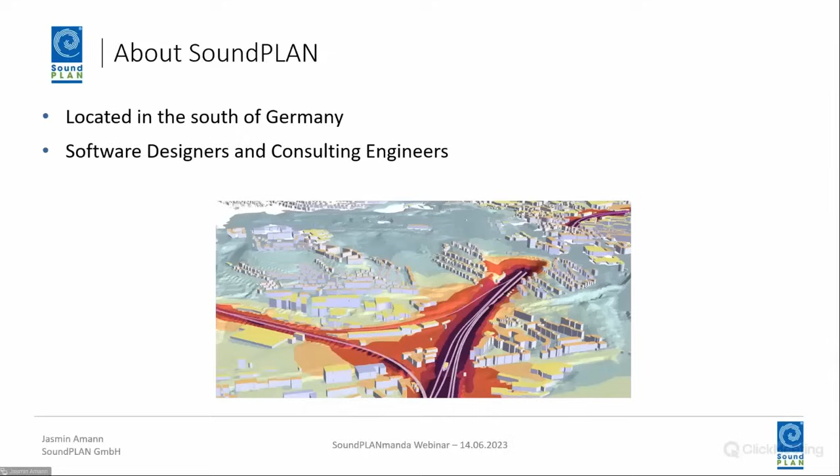SoundPLAN is a small company located in the south of Germany. The 25 employees work as software designers and consulting engineers for noise control and environmental protection. SoundPLAN is an innovative software company and engineering firm active in different fields like noise control and noise mapping, room acoustics, and occupational health and safety.

SoundPLAN offers different software products. First of all, SoundPLAN Noise, it's our all-rounder. Then there is SoundPLAN Essential, it's like the little brother from SoundPLAN Noise, it's for beginners. Then we have Saruma, the software for room acoustics. And last but not least, what we are going to look at today, SoundPLANmanda, the mapping and analyzing software in the field of occupational health and safety.

So I would like to give you an introduction to occupational health and safety. It is well known that too much noise in the workplace is harmful. Too much noise leads to hearing damage in particular. Studies show that high levels of occupational noise are not unique, the problem exists in all regions of the world.

For example, in the USA, more than 30 million workers are exposed to hazardous noise. In Europe, 25% to 33% of the workforce is exposed to high-level noise at least a quarter of their working time. In addition, noise-induced hearing loss is the most common occupational disease.

So, what are the problems and consequences of noise-induced hearing loss? It is a result of long-term exposure to noise. The problem with noise-induced hearing loss is that it is chronic and irreparable damage. This means noise-induced hearing loss cannot be cured.

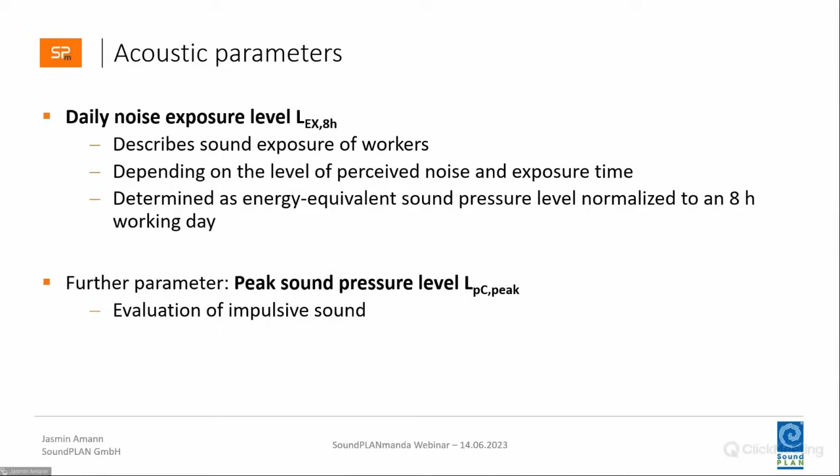A further parameter is the peak sound pressure level, LpC,peak, and the peak sound pressure level is the evaluation of impulsive sound.

So, like everywhere, there are different legal regulations in different countries. For example, in Europe, there's the Directive 2003/10/EC. In the USA, there are some more regulations, for example the Department of Defense Instruction or the National Institute for Occupational Safety and Health.

There are various regulations around the world, some of them are listed here. And the application of the regulation depends, of course, on the country in which the risk assessment is carried out.

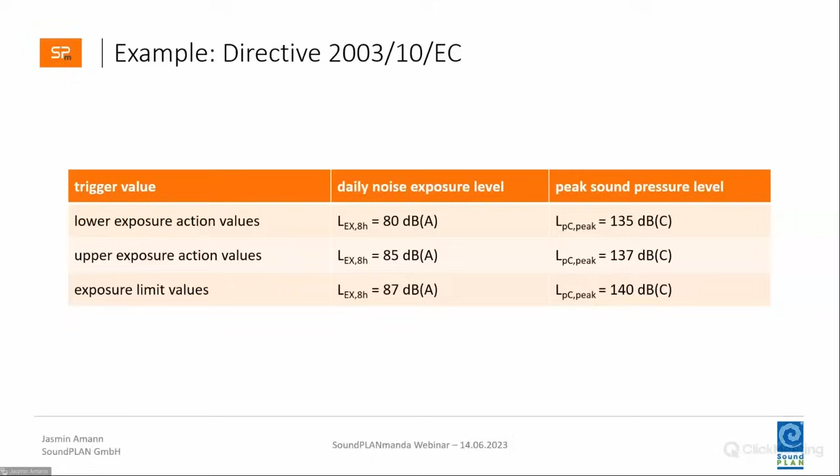For example, I would like to show you the trigger values of the Directive 2003/10/EC. There is the lower and the upper exposure action value for the daily noise exposure level and the peak sound pressure level. The EU directive also defines an exposure limit value. And if the trigger values are exceeded, measures must be taken, for example the wearing of hearing protection.

So we have learned so far that excessive noise exposure in the workplace can have serious health consequences. Exposure to high levels of noise for too long can lead to noise-induced hearing loss. And only when it is known that employees are exposed to too much noise can effective measures be taken.

There are also legal requirements for compliance with the noise exposure level, and therefore an assessment of the existing noise exposure is mandatory. So for the determination and assessment of noise exposure, there is SoundPLANmanda, the mapping and analyzing software.

SoundPLANmanda is our new mapping and analysis software in the field of occupational health and safety. The basis in SoundPLANmanda are classical sound pressure measurements. The measurement data can be easily imported and several measurement data can be offset against each other, for example the mean value from several measurement data can be formed.

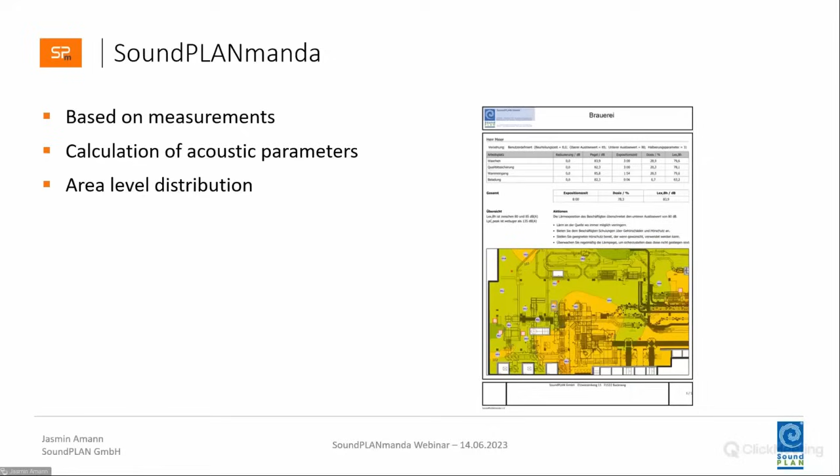However, these measured values do not say anything about the noise exposure of an individual employee. So based on these measurements, SoundPLANmanda determines the acoustic parameters such as the daily noise exposure level. The noise level distribution is clearly presented in colored noise maps, and the size of the mapping area is not limited. It can be a small room, a large hall, or an outdoor area.

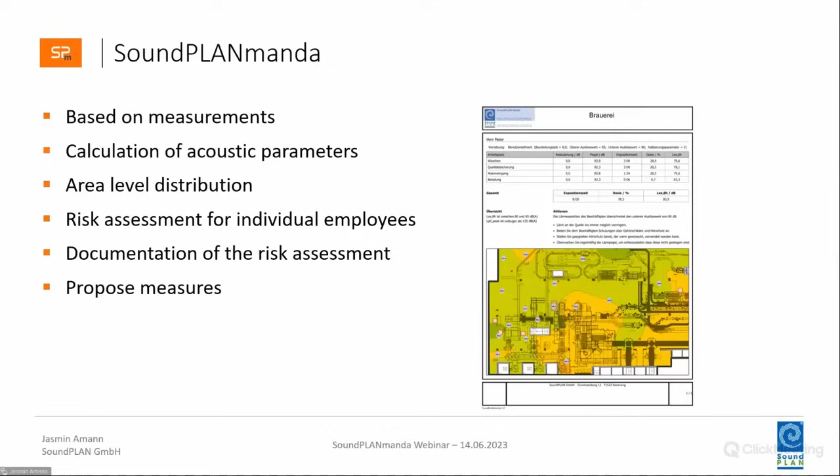SoundPLANmanda can also be used to perform a risk assessment for each individual employee. The risk assessment can be saved as clear documentation and easily presented at any time during an audit. Depending on the guideline used, appropriate measures are recommended for correspondingly high exposure levels and are listed in the documentation.

Jochen will now give you a brief overview of SoundPLANmanda's field of application and what our goals were during development. Thank you, Jasmin, for the introduction. Thanks very much, I will have to share my screen now.

Let's start SoundPLANmanda. I should see everything. This is the starting screen of SoundPLANmanda. SoundPLANmanda is a single document application.

With the tab sheets here on the top, you can go through the different working areas, input areas, and output possibilities of SoundPLANmanda. Those tab sheets are organized in the way you work in your project, so you start from left to right, with the results on the right side.

Okay, let's start together and create a new project. Demo, we will look into a brewery. Project number, and project engineer, customers - I don't have demo online. You can have a description and things like that. This might be very helpful, especially if you have a longer project that is running for a longer time.

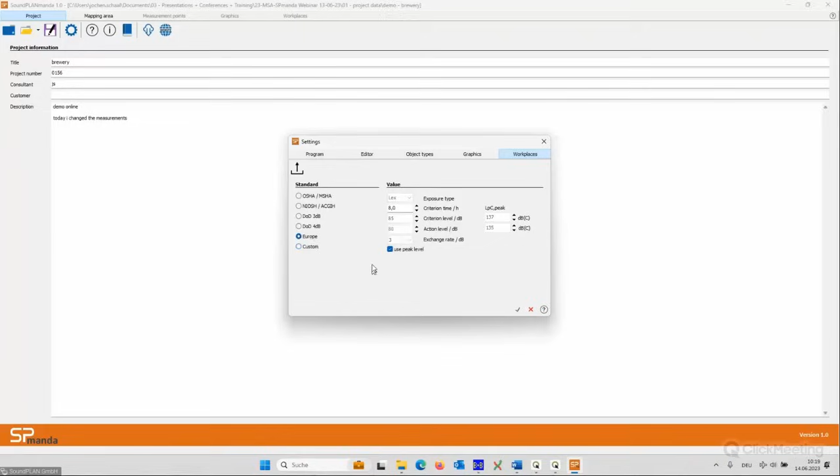Then we have the help. Everywhere in the software you can open the help and go through the information here in the HTML help. This is also sensitive to where you are in the software, so if I go back to the settings and open the help, it will directly jump to the settings here and give you information about the settings window.

Then we have an info splash screen giving you information about which software version is installed, also the license file and things like that.

And the next one would be the manual. There's a manual available in PDF format. You can load it directly here from the software, read through it, print it, whatever you want to do.

Then we have two buttons related basically to the internet. The first one is updates. So you can check here for updates and news in relation to SoundPLAN. So if there's a new version, you could download it here.

Interesting is also the bug fix history, so you can directly see what are the changes that happened in the software over time. And the last one would bring you to the SoundPLAN homepage, where you can find more information about our other software products, trainings, and things like that.

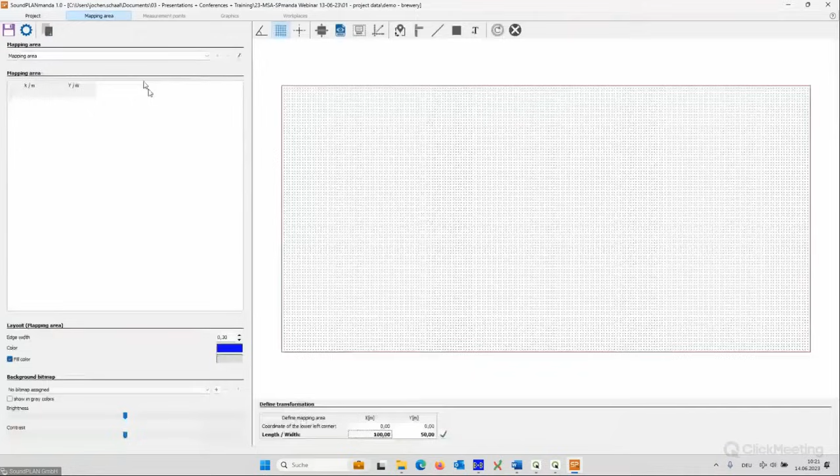Okay, let's start with the real work. So then I changed the tab sheet here from project to mapping area. And now we have here on the right side our working area where we define the mapping area. Such a mapping area could be any area. It could be inside of an industrial site, it could be outside, it could be one room, it could be a whole industrial building, whatever. So basically you're completely free, it's just defining the boundary area of the mapping.

There are different ways of defining such a mapping area. I will explain all three. The first one I want to show is by using down here this coordinate definition. So you could say I have a rectangular hall. The left lower corner I want to have at 10, 10, and the size of the mapping area is 150 to 60 meters.

And then you just press here on the tick mark, but as the hint gives you further information, if you press Control at the same time, it will automatically generate such a mapping area. And that's what I did. Over here you can see now the coordinates of the mapping area. So the lower left corner is 10, 10, and the upper right corner is 160, 70, so plus 150 and 60 meters.

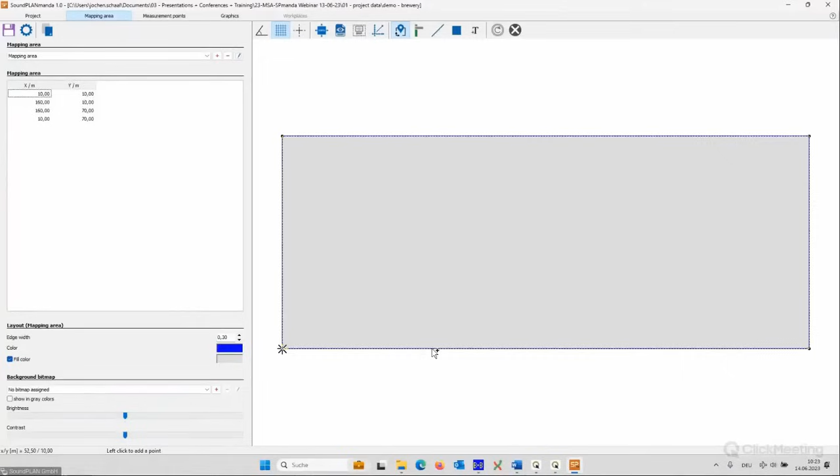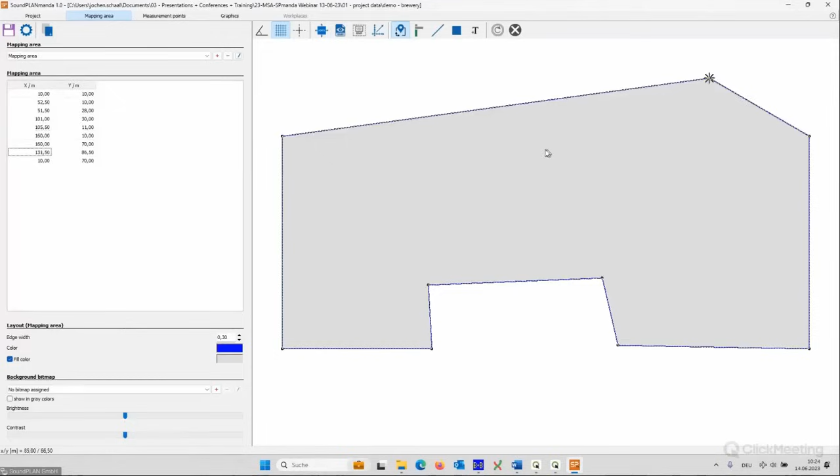You could always add coordinates or delete them if you want to do that. That's very simple, so you just go onto the line and say okay, I would want to have an additional point, maybe another additional point, and now you can start moving them around, add more, and introduce them however you want to do that. Of course you can also move around the original points. No, that was introducing a new one, so I delete that one. Deleting is also possible, you just press in the Shift key, and now you can delete it.

So it's very simple to change the layout of your mapping area. And this table with the coordinates helps you to keep track of the coordinates, the values of the coordinates. So you not only have the graphical, but also the tabular information over here.

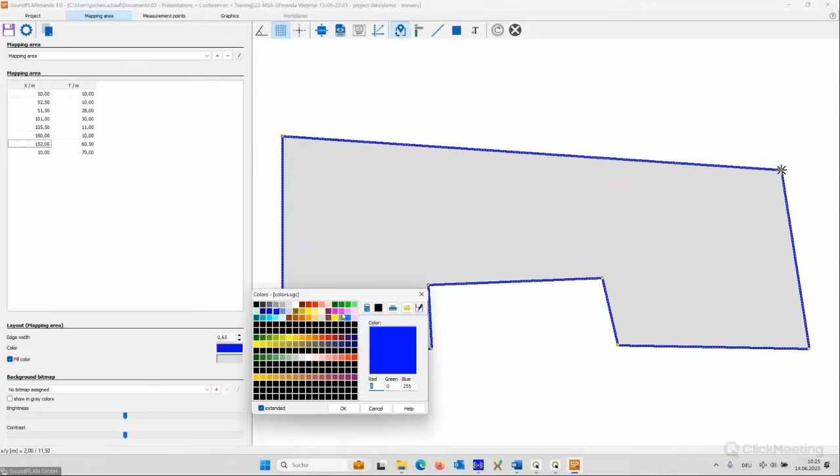Then we have the possibility to change the layout, so you can change the width of the border of the mapping area, of the edge. You can do that here by those small arrow keys, or you just use the mouse wheel up and down to change the values of the width. You can, of course, change also the colors. You can either use the predefined colors from SoundPLAN, or you can use this extended function to create your own colors. I will not show that now, so I just use a predefined one for the coloring of the edge line.

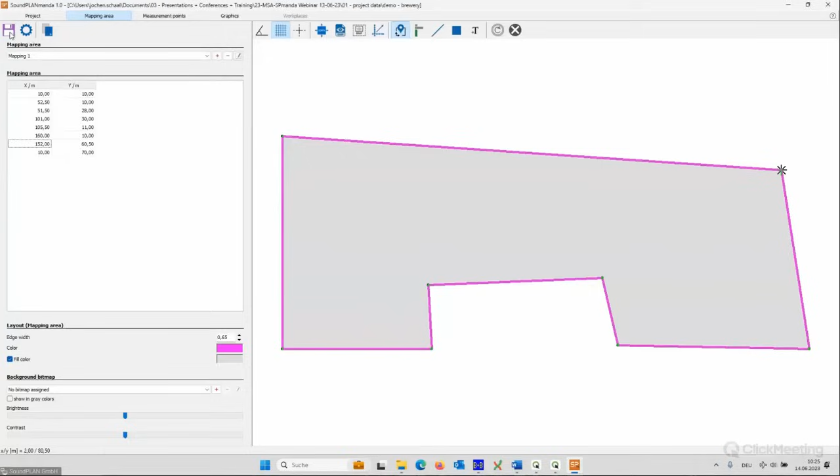Okay, that was the first option. Let's rename it mapping number 1. And then I save it. And I create an additional mapping area, because in SoundPLAN there are no limitations, you can have as many mapping areas in one project as you want.

So now I have a second one, and of course I have to enter now the border lines as well. And now I use also the tabular information down here, but now I use it only to define basically the viewport where I want to start working. So to explain that, I change here the lower left coordinate to 1,000 to 1,000 meters. And if I press now the tick mark without Control, it just moves to this area. You can see this here in the lower left corner, you can see always the coordinate of the cursor.

So now I'm around 1,000, and now I could enter the building or the mapping area in this coordinate range. To do that, I can use, for example, the grid mode. Okay, there it is.

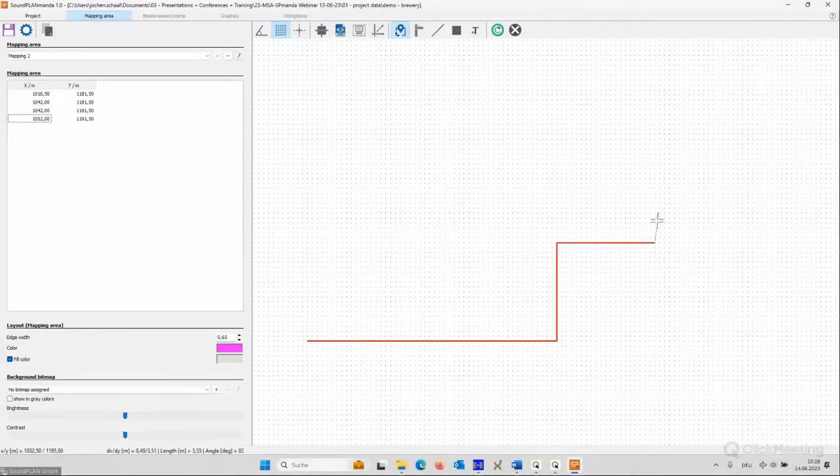And together with this information down here in the lower left, you can see the distance also to the last point. So it's easy. Now the distance is 10 meters. Left click, I go upwards. And again, 10 meters. Like this, it's very easy to digitize here in this grid mode.

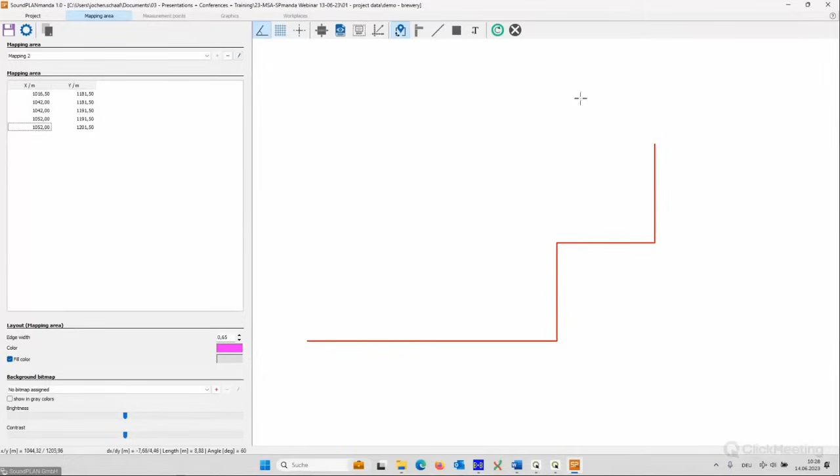But we not only have the grid mode, we also have angle mode. And now you can see I can only move in these 15-degree angle steps, which I defined in the pre-settings, which makes it again very easy to define the building or the shape of the mapping area.

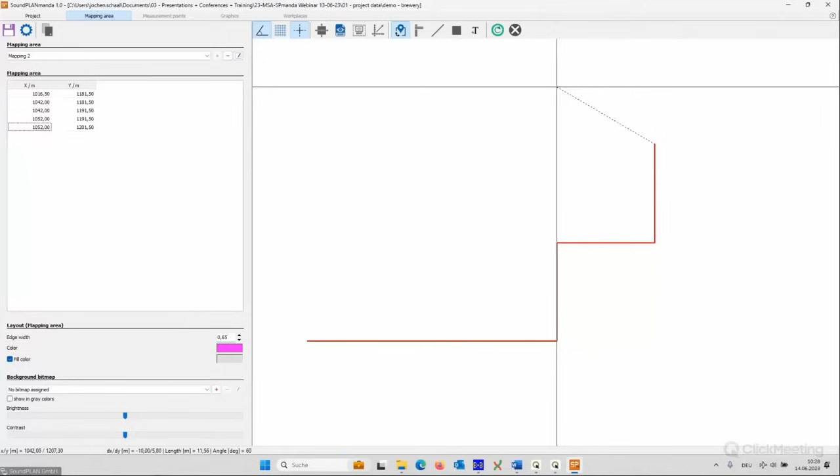Together with this crosshair, I can also find other corners. Left click, and then maybe go down again, and then like that. And then you might want to place the last point and finish the input of the object.

Then we have here, you have seen already, I moved in and out with the mouse wheel, basically. Very easy. When I press the mouse wheel, I can move around. If I'm sometimes lost, you just click here on the fit in, and it will fit the geometry into the screen.

Now, I would like to show another function. At the moment, this lower left corner is at 1016, 1181, and I would like to change the coordinate origin to 0, 0 for this point. And we have a function for that, change 0. And now I just click here on the corner point, and you can see now it's 0, 0.

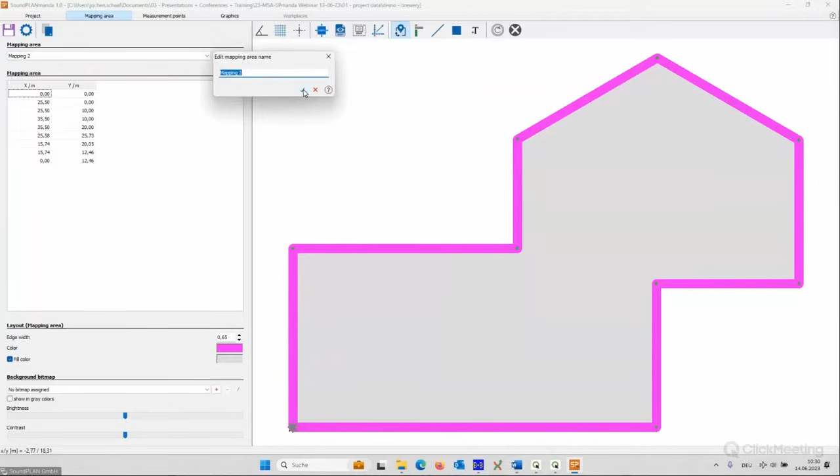And now it's, of course, much easier for me to define points afterwards inside of the mapping area, which I have measured in the distance of this lower left corner point, for example. Okay, let's continue to the last possibility, how to create a mapping area. Mapping number 3. I guess this is the most common approach.

Now we will load a bitmap into the background and digitize the border of the mapping area on the basis of this bitmap. So I press the button for the bitmap, go to a folder where I have some bitmaps. Okay, select it. You can use JPEG, bitmap, PNG, TIFF, or PDF files. I have a JPEG I want to use.

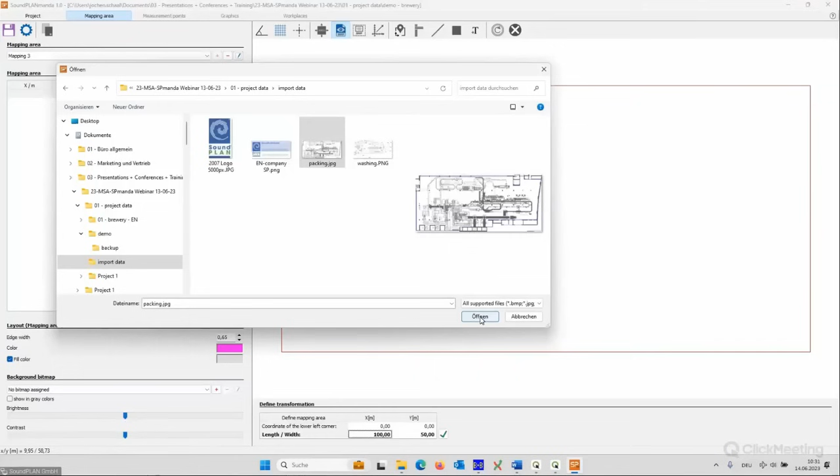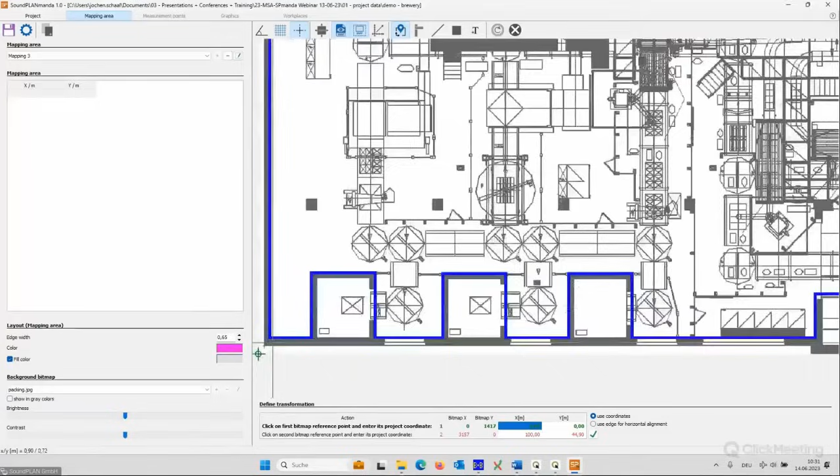I open it, and of course now I have to introduce some scaling because otherwise the program will not know how many pixels is 1 meter basically. To do that, I have to georeference the bitmap, and for that, of course, I have to know the coordinate information of some points of the bitmap. And I have measured, or I declare this corner point down here to be 0, 0.

And then I take another point, which I have measured in the bitmap, or know from the map up here. And I know the distance from the lower left to this one is 75 meters in the X direction and 30 meters in the Y direction. And so I've created now those 2 points to georeference the whole thing, the bitmap. If I press now the green tick mark, I accept the transformation.

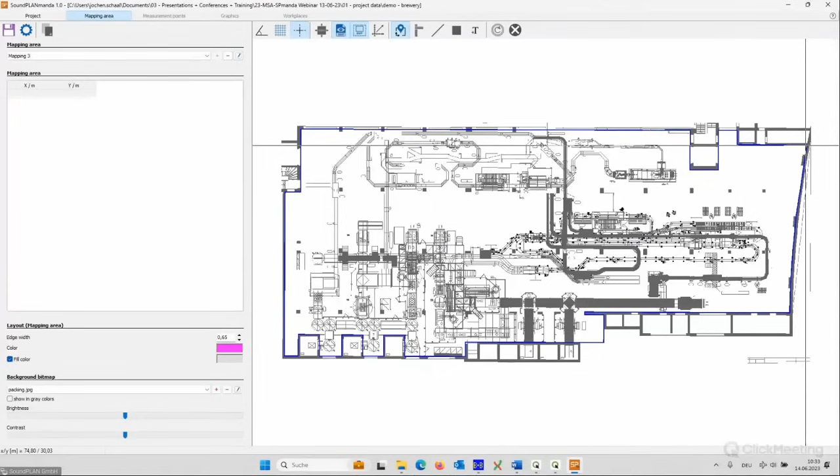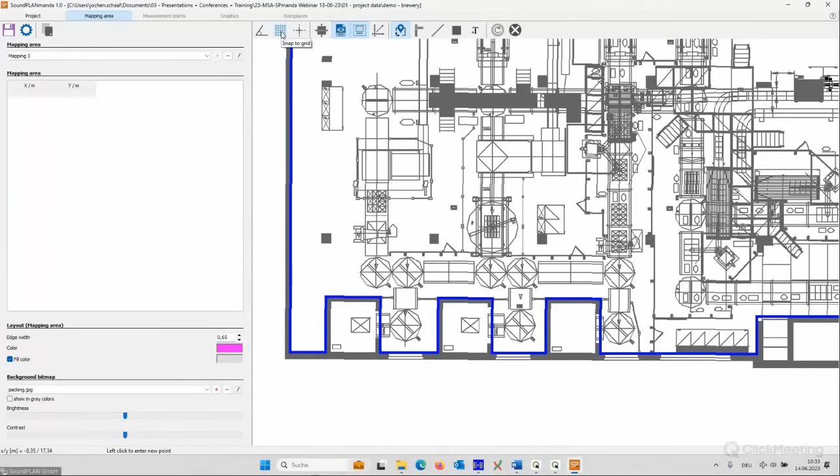And now if I go down here with the cursor, you can see, yeah, here it's round about 0, 0. And up here it should be 75, 30. And now I can introduce the border of this industrial hall. So I will start down here. Okay. And I will use the grid to snap to 0, 0. Okay, first point.

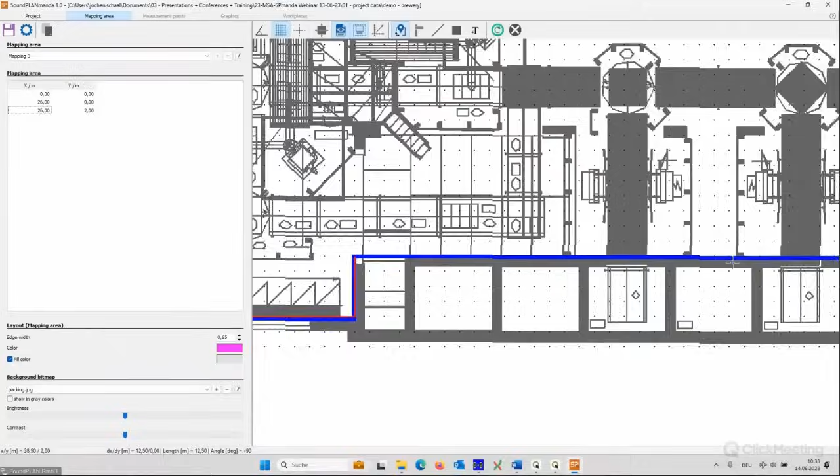And then I can snap the next point down here. Fits quite well. That fits also. Remember, I have just a 50 centimeter grid, so it will not always fit like here. It doesn't match anymore. And then I just switch to the angle mode and continue to digitize the border of the room.

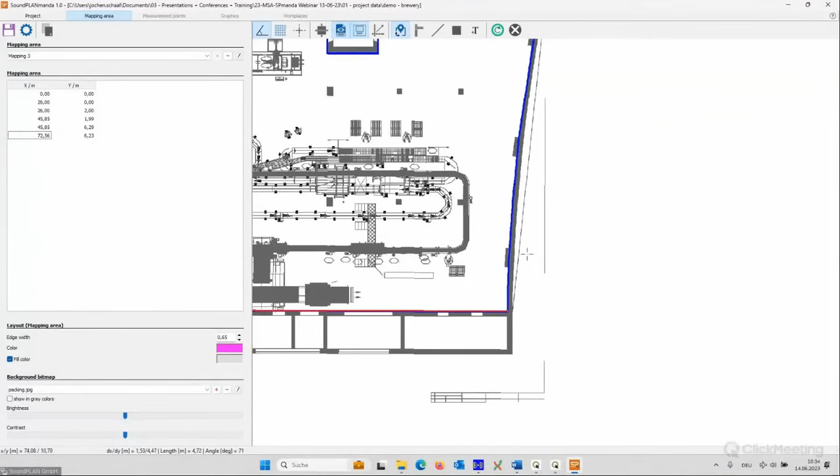Okay, now I'm still in the angle mode, and now it gets a bit tricky because I have the 15-degree angle mode, and it will not be possible to digitize this wall. So I could switch off the angle mode up here, but to make it easy for you as a customer, you can also press the Control key, and then it's temporarily switched off, and now I can follow the line here without the angle mode.

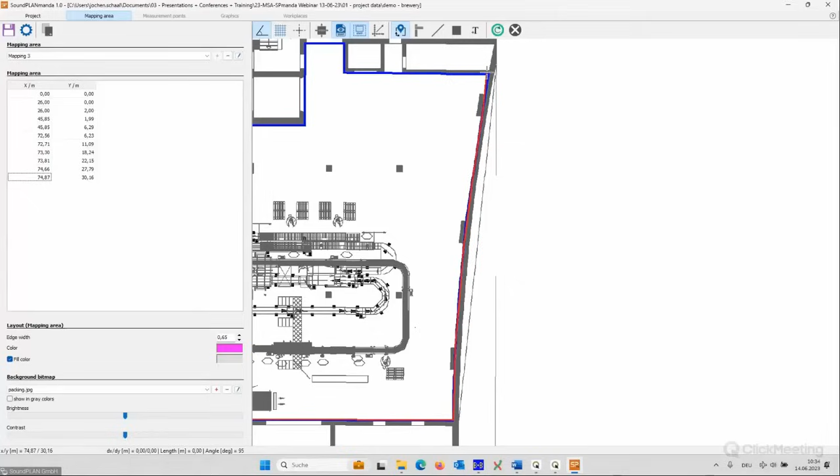Oops. And now I release the Control key and I'm back in the angle mode. So only 45-degree steps are allowed. And with a double click, it will close the mapping area. Okay. So very simple to define such a border.

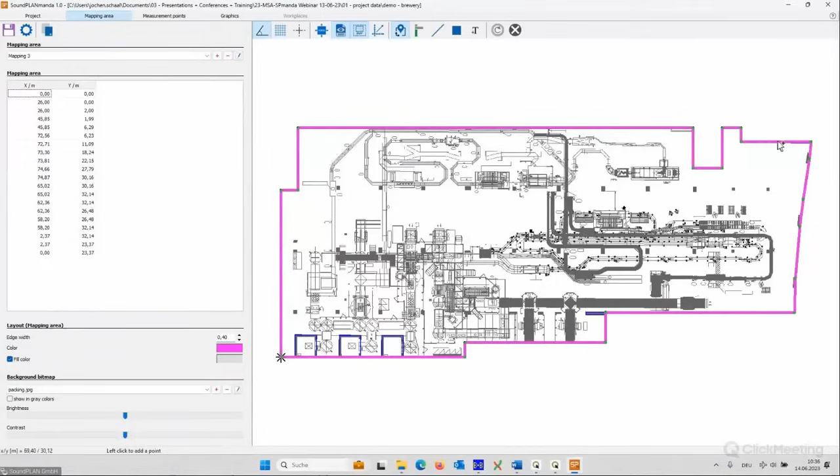Let me look if I forgot something. Oh, that looks okay, looks good. Then we have some options for the bitmap. I can hide it or show it. And at the moment, the bitmap is clipped to the border of the mapping area. If I want to see the whole bitmap, there's also a button to do that. I prefer to clip it. Okay.

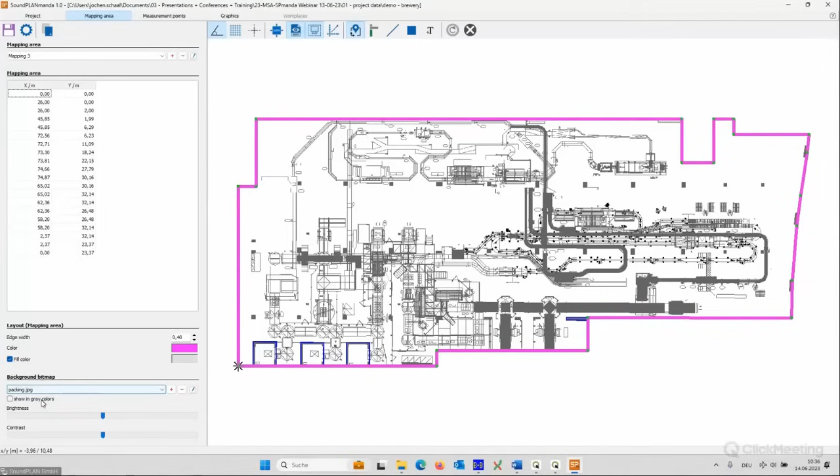Now, some other things to say about the bitmap. You can change the appearance. You can show it only in grayscale. So I have a colored bitmap. You can see here some blue lines, but I only want to see the bitmap in grayscale. So I do that. And also you could change the brightness or the contrast. I will not adapt that. That fits quite well to my needs.

If you want to, you could add additional bitmaps, so you are not restricted to one. You could have multiple bitmaps you can load and use in your project. You can just add them here with the plus. If you are unhappy with the georeferencing, the coordinate definition, you can change that later on by pressing this button and do the georeferencing for the bitmap once more.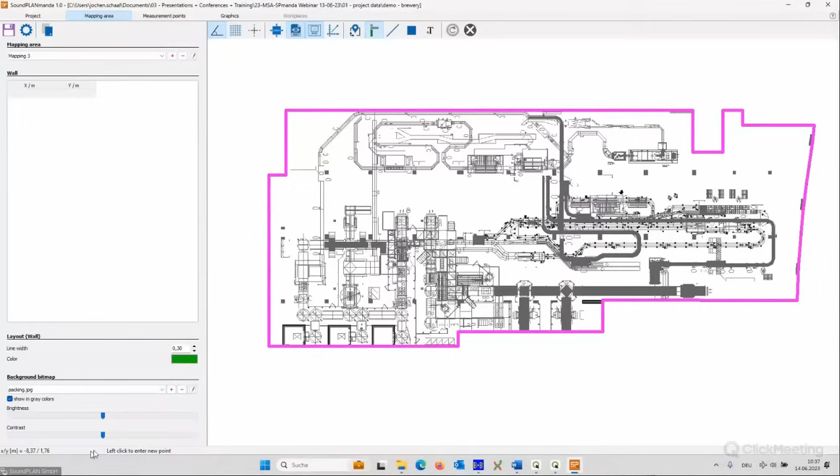Okay, now we want to introduce some additional walls inside the room. So for example, down here I have some separate rooms. I select here the object type wall. You can see here in the lower left corner, we have now the layout for the wall. And defining such a room at the border of a building is very simple. You just go to, for example, your upper left corner, press the, sorry, my fault. I delete the object.

Press the left mouse button, keep it pressed and pull open a rectangle. And then release the mouse button and it will clip the wall to the border of the building. So very simple to do that. You do not have to digitize all the points. Just pull open a rectangle and you will have such a basically closed room.

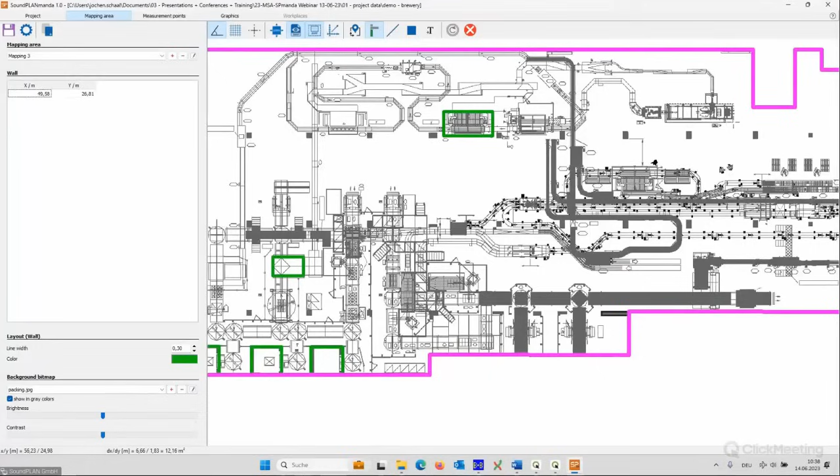Then you could say, okay, there's some large machinery inside of the building that I would like to consider also to break up the noise field, basically. So, for example, maybe this one. Let's say that one as well. And maybe we have another one over here. But that's something you have to decide yourself when you did the measurements in the room.

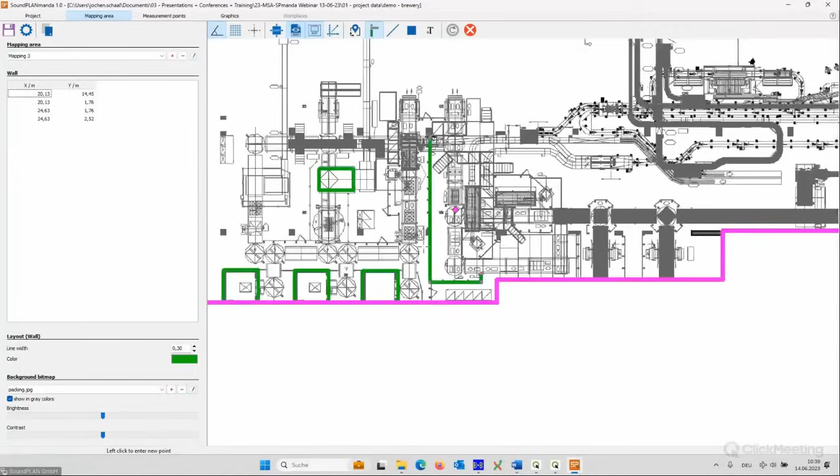And a last thing, I want to introduce here a wall freely standing in the room. So first point, second point, third point, and fourth point. And then I close the wall. So those walls can have 2 points, multiple points, can be a closed structure, whatever you want. So that's all for mapping relevant objects, I would call it.

Then we have also the possibility to introduce lines and areas just for graphical information. So if I want to highlight maybe a certain line, I can digitize it here, and it will be displayed later on in the graphical output just for display purpose. So it will not influence the definition of the noise field.

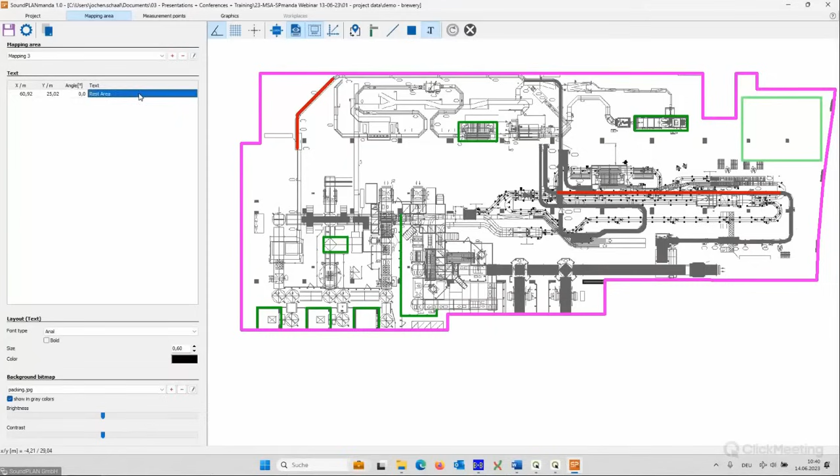Then we have an area object, so we could introduce up here maybe an area. I don't want to have a fill color, but maybe make the border a bit thicker and maybe a different color, and introduce here a text inside. That seems a bit difficult. Last time it worked without problems. So I place it here and I call it rest area. Okay. Oops. No, it's that. And move it inside here.

If I want to change, of course, the font type or make it bold, you can do that. Also change the size of it. And of course, also the coloring. So maybe I use the same color as for the border line. Like that, you can create the interior of your mapping area. In this case, of course, it's an industrial hall.

When you are finished with that, you continue, of course, to introduce your measurement points. So we go on to the tab sheet measurement points. It creates automatically a measurement file, we call it, where the measurements are stored. So again, we can have multiple measurement files, not only one in a project. Might be helpful if you did measurements during different days, or if you have measurements for different mapping areas, of course. So let's start.

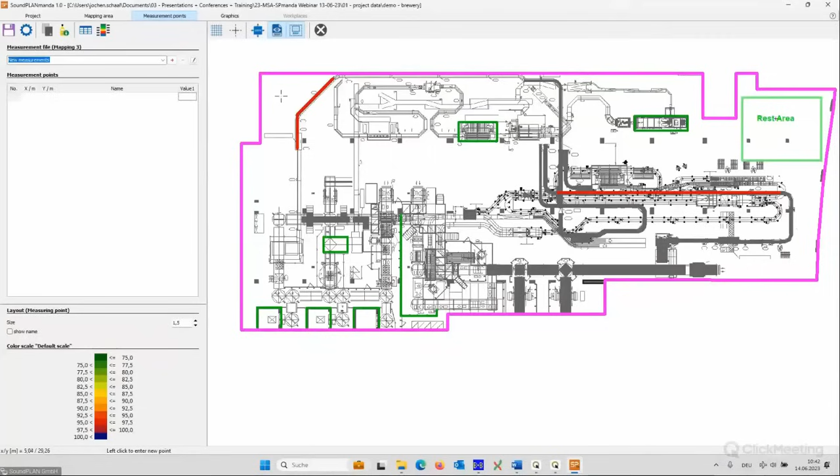Let's assume we did some measurements, and the first measurement we did over here. So I just left click in here and say, okay, value, let's say we measured 90 dBA. And then it colors the whole room with the color for 90 dBA. So it's using a default dBA color scale, which can be, of course, adapted to your needs, but that's the default. And of course, then you should do multiple measurements in such a room.

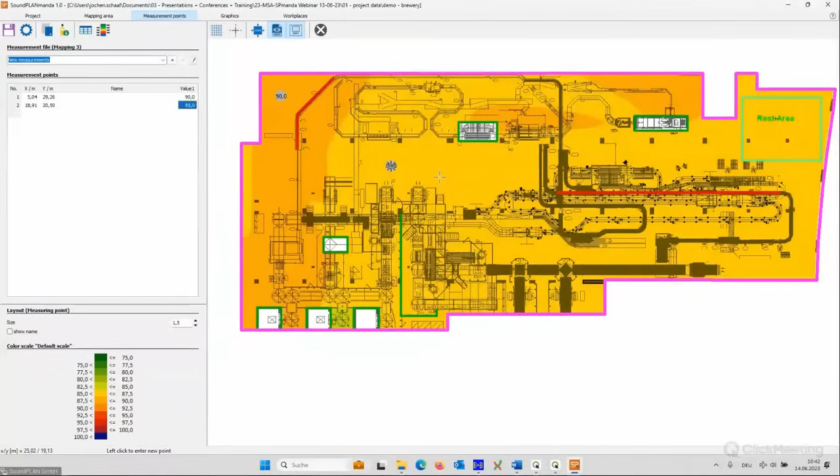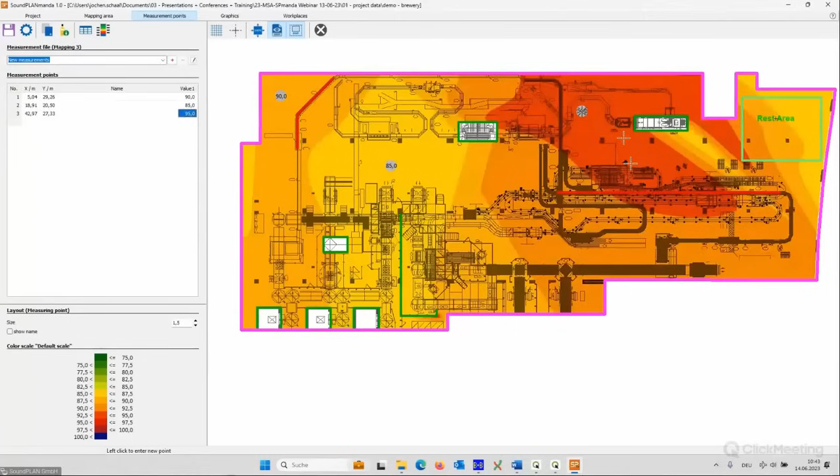So for example, let's say we measured over here just 85 dBA. And then it tries to color the room with the second value. But of course, for such a large room, and especially if you have also introduced such structures breaking up the noise field, you need much more measurements. So for example, let's say up here we have 95, and like that, you create the map for the measured room.

And last one maybe 88. Well, this is how you can enter the values manually. Of course, here again it's very helpful that we can see the cursor coordinates always in the lower left corner, so we can find the position of our measurement point. We can use the grid again, so you can snap to the grid, which might be helpful. And remember, in the settings you could change the grid size to a smaller value than the 0.5 meter I'm using here at the moment.

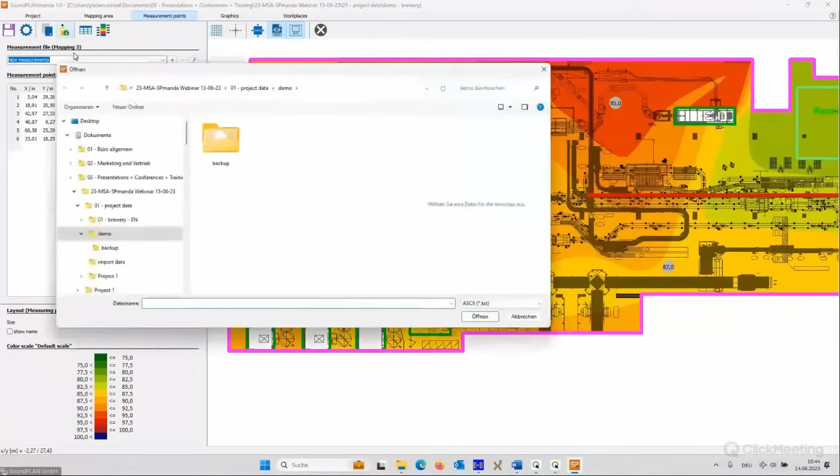But there's another possibility to make it easier for you. You can also import measurement data. We are importing simple text files, so plain structure. The first line can be a kind of header, and then we have semicolon-separated measurement points, as you can see here in the file. So we have a name, X, Y coordinates, a height coordinate for the measurement point, and then we have 3 measured values, SEL1, SEL2, and an LPeak value.

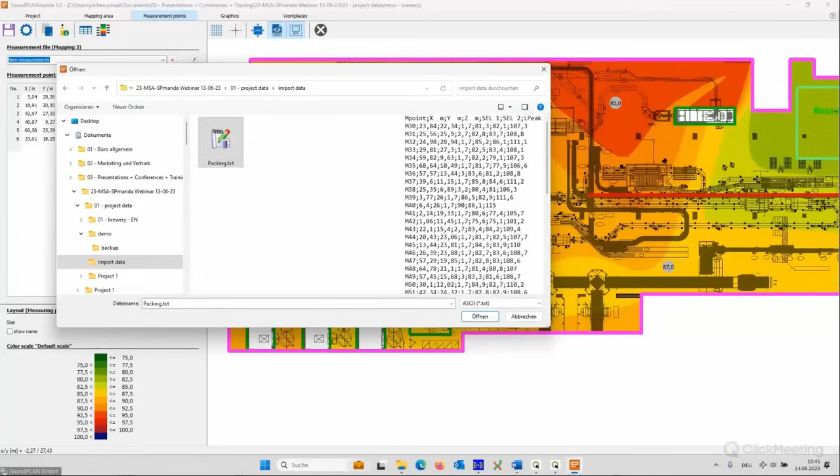Such a file you could generate easily in Excel. So if you did the measurements and documented them in Excel, you could just export it as a text file and then load it into SoundPLAN Manda. So I open now this text file. There's also the preview again, so you can understand the contents of the text file. We have a header, number of title rows is 1. And then we have to assign the columns of the file to the information in SoundPLAN.

So we have a measurement point name, which we assign here to point name of Manda. Then X position is column number 2. The first value is SEL1, and the last one is column number 7. So it's very simple to assign such measured values to the structure in SoundPLAN. When I press OK, it has imported the measurement data.

You can see it has now created an additional measurement file. That was the one we entered manually, and now there's a second one called packing, which is the name of the text file. So it used the name of the text file as naming. And this is the result. Now you can see we get quite a nice noise field for the room. I think you shouldn't measure with many fewer measurement points. Like this, you can get a quite nice looking picture. So you need quite a lot of points for such a large room.

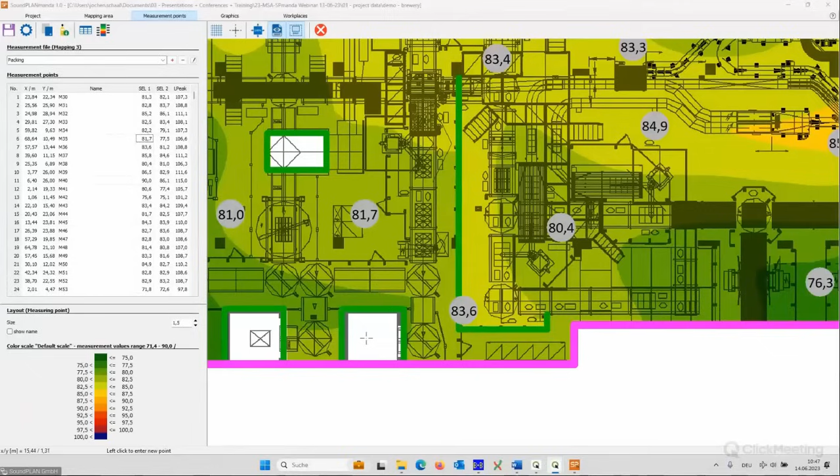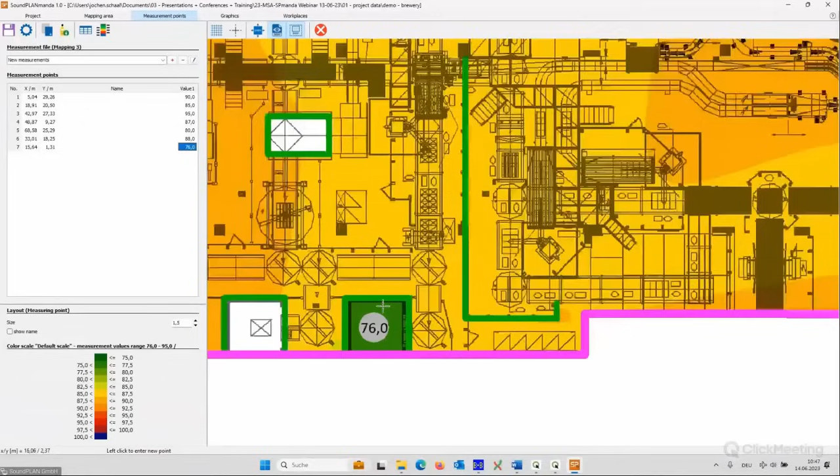One thing I would like to show, which I missed before in the other one: if you have such an enclosure, let's go back to the other one. Don't want to destroy this one. If you have a measurement point in here, and let's say in here you measured 76 dBA, you can see such a wall is really breaking up the noise field. Oops, sorry. Left click. So it's just coloring inside the enclosure with the 76, and the rest outside stays as it was before. Okay, let's go back to the imported measurement file.

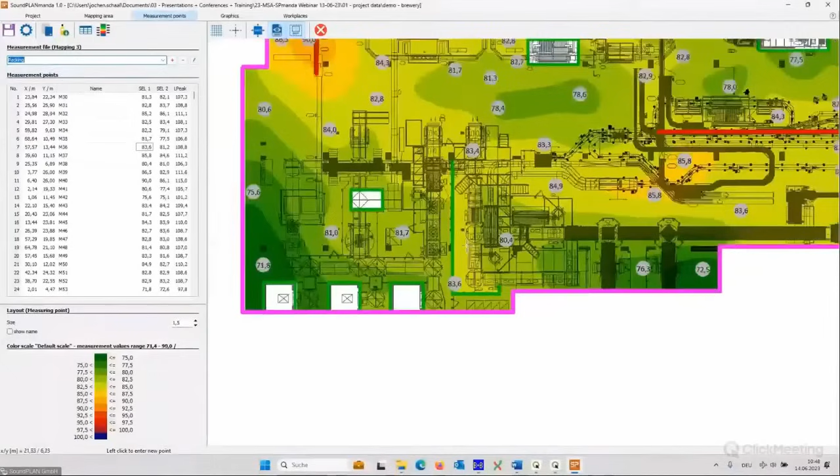So what do we have? We have imported multiple measurement points with names which came from the measurement file. Then we have imported 3 values representing 3 different measured values: 2 LAeq values, called SEL1 and SEL2 in the measurement file, and a peak value. For SEL1 and SEL2, the default scale of course makes sense. For the peak values, which are much higher, the default scale doesn't make sense. So I might want to change the scaling. I can do that.

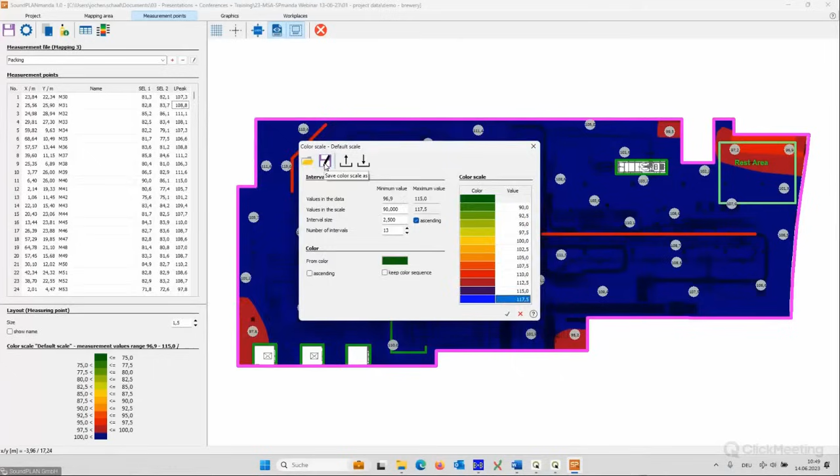Let's say we start at 90 and use 2.5 decibels as interval. The rest seems reasonable. If I want more than 12 intervals, I can also change that. So now I would have 13, and it automatically sets the colors. Of course, you're completely free. If you'd like different colors, you just left click here and choose, oops, that should change the color. Now I should not overwrite the default scale, but save the new color scale as, let's say, peak.

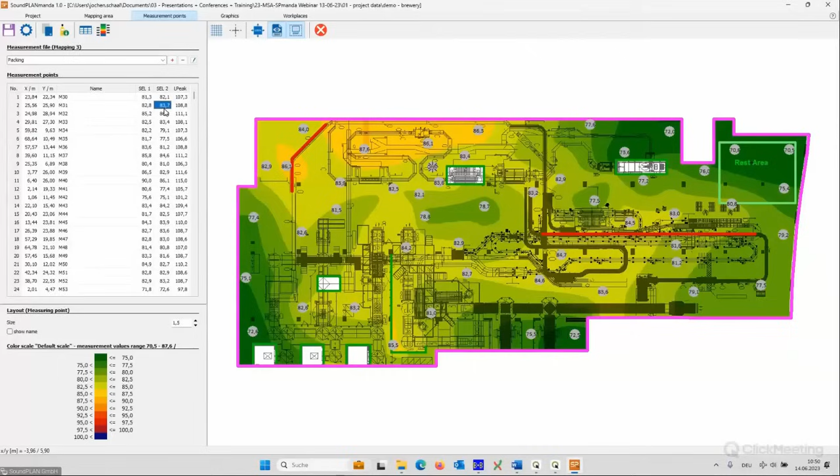And I can see here we have a color scale peak, which is assigned to the column peak. And for the other ones, SEL1 and SEL2, it's still using the default scale. And if I go to the peak values, it's now using the new color scale peak.

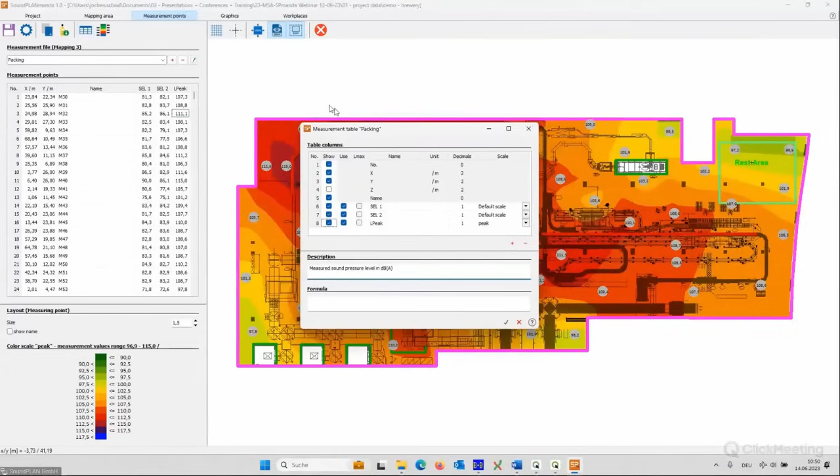Okay, let's dive a bit more into the table structure here. If I click on this button, I can edit the measurement table setup. You can see we always have by default a number for the measurement points, X, Y, Z, and the name. These are default columns; I cannot change or delete them. And then I have the imported SEL1, SEL2 and the peak value. Something missing, because the software doesn't have the information until now, is the unit.

So I could enter the unit here. The peak is measured in dBC. The description is, of course, measured sound pressure level in dBA. And like that, I can do it also for the others. Oops. Control C, next one, Control V. And for the peak.

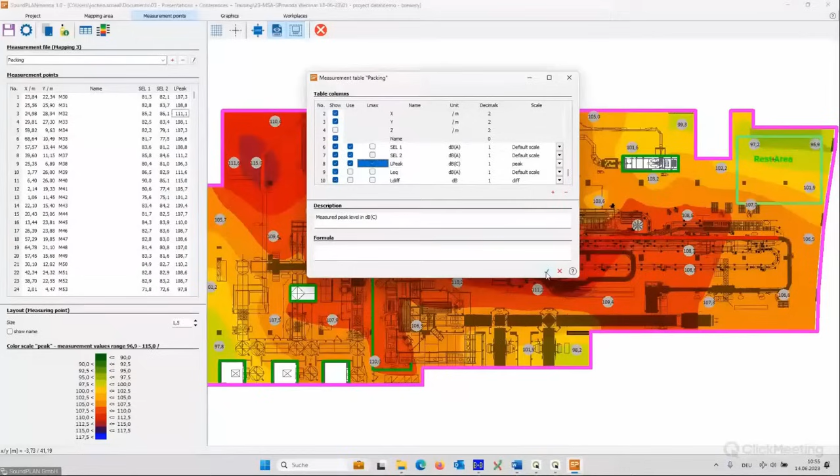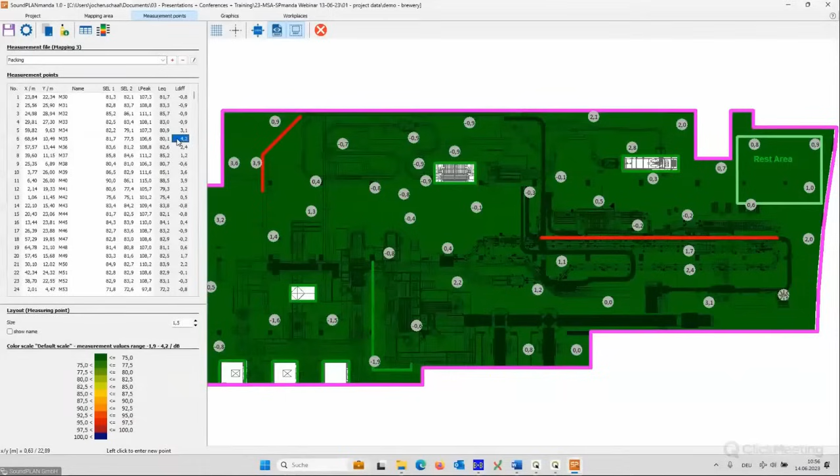And now I've got 2 additional columns here, LEQ and LDiff. So this is the mean value between SEL1 and SEL2. And then we have the difference between SEL1 and SEL2. And it's unfortunately using the wrong color scale, so that didn't work. Let's try to do it again. Now it's fine. So this would be the difference color scale from -2 to +5 dB.

And you can see now the difference between two measurements, SEL1 and SEL2. So like this, you are preparing your mapping area and introducing your measured values. And as I showed you, you can also use formulas to create new results you can display, and of course, later on, print or export.

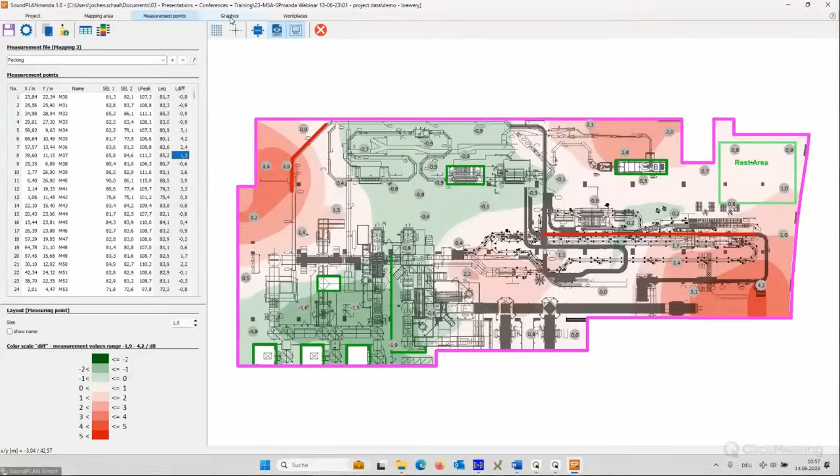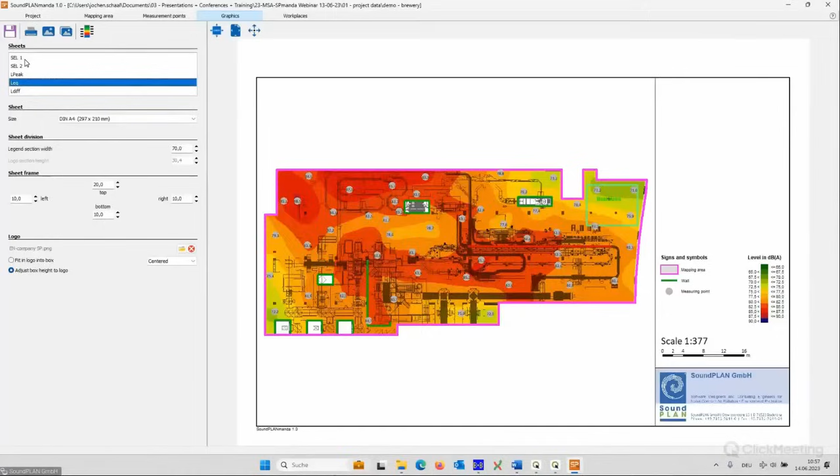Okay, let's go further on to the graphics, which is the first tab sheet for documentation. Here in the graphics, you see all the sheets we have. Basically, for every value, it's creating a sheet: SEL1, SEL2, LPeak, LEQ, and the difference level. And you can see it automatically creates such a map.

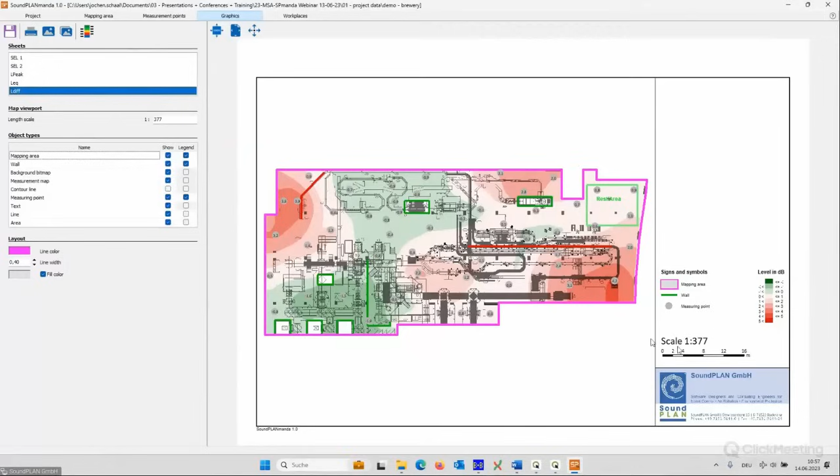I chose A4. There are signs and symbols for the display. There's the scaling. The scale of the map is not very good. It's 377. I could change it graphically, of course, but it's more convenient to change it numerically. And now it has the scale of 1 to 400, and it introduced automatically my company logo.

For each of the maps, the sheets, I can also introduce some descriptors. If I click up here in the upper right area, I have basically a title and a text field. So I introduce the title, and then I have the text. I can enter manual titles or texts, but I can also use text variables, for example. So I could have here the project title,

and maybe in the text field, I would like to have the mapping area, which mapping area is displayed, and maybe which measured value, together with the description.

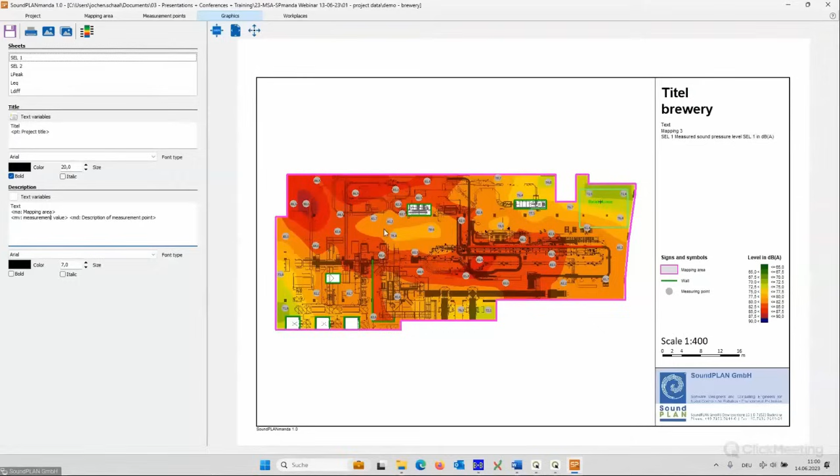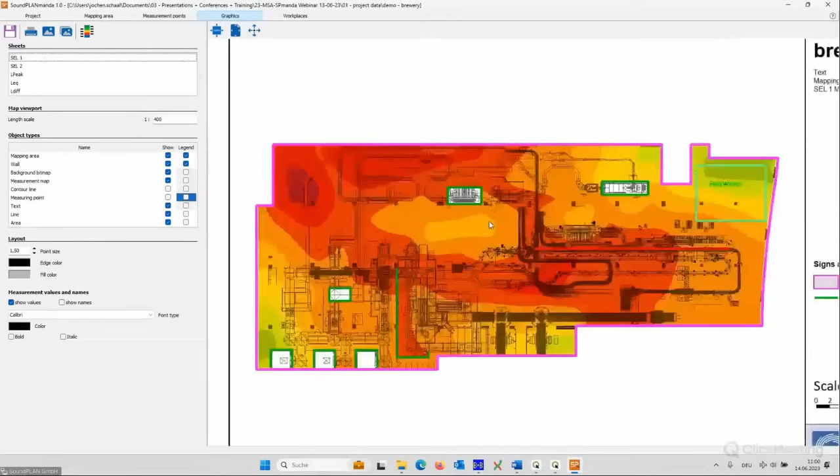If you are happy with the layout and setup, you could also decide - well, measurement points are nice to see, but I don't want to have them in the output. No problem, you go here to the object types, measurement point, show it - no. And of course in the legend it should not be shown as well. And then you could print it like this.

If you want to stick with the measurement point and maybe even get some more information for the measurement point - okay, that's not nice, the edge color, what's going on here? You could also show the name. So now the name of the measurement point is displayed, and could print it like this.

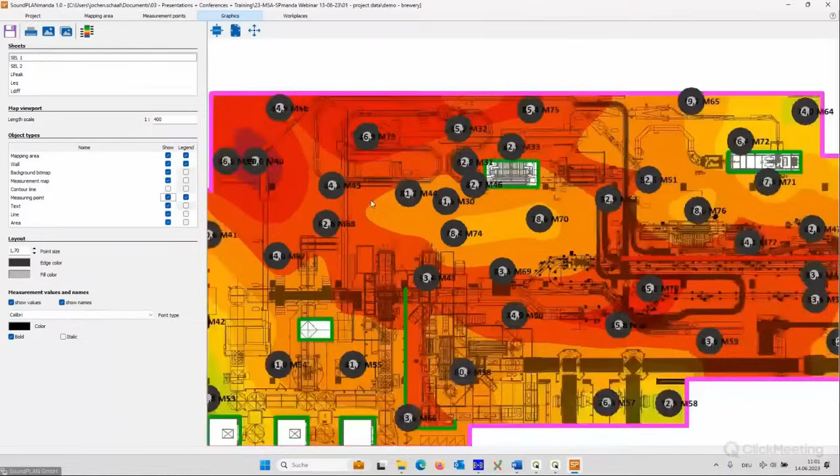Basically you can adopt all the different objects that are displayed over here in the map, and you can change the measurement map, for example. No, so where is it? Measurement map, the background.

The contour lines - at the moment I'm not displaying contour lines, but you could switch them on if you want to. Switch it on is over here. Now they should be shown.

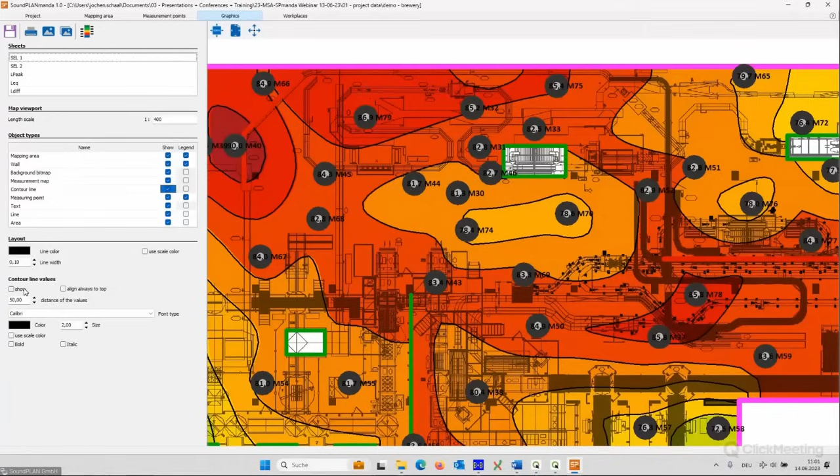And then I could also have text with the inscription of the dB value or the value of the levels displayed. And of course you can change the size again. If it's too big, you just make it smaller, whatever.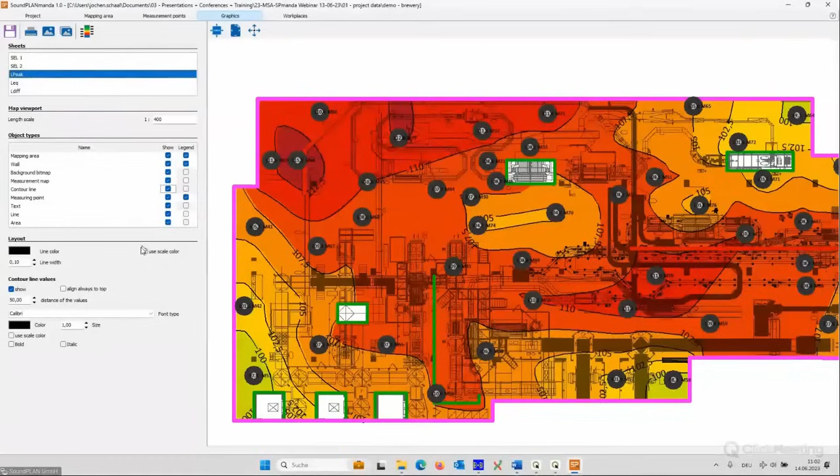So you have a lot of options. For the display, basically, there are not a lot of limitations. You just have to change them in a manner how you want to use that. If you are happy with your setup, of course, you can print it.

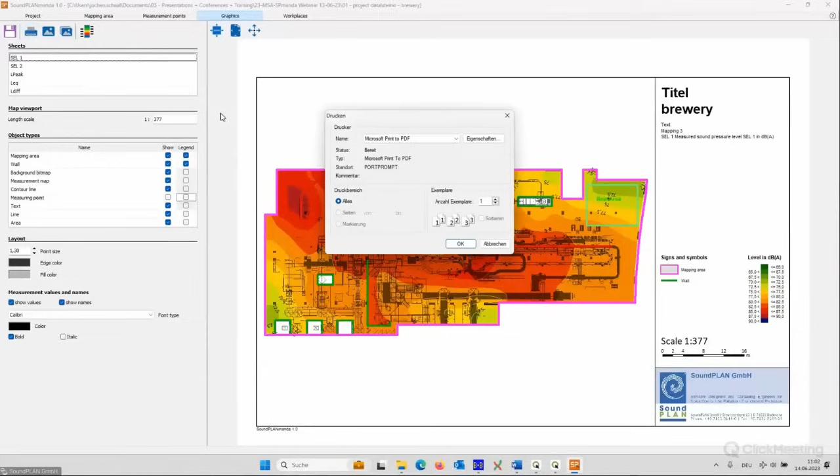Let me do it like that. So let's find it - here it is. So this is the printed PDF.

You could also export it or save the sheet as - this means I can save it in a graphics file with some options of the resolution and the color depth.

And the last one, copy the current sheet to the clipboard, and then you could introduce it directly into a report in a Word or PowerPoint or whatever. So like this, I showed you now for one.

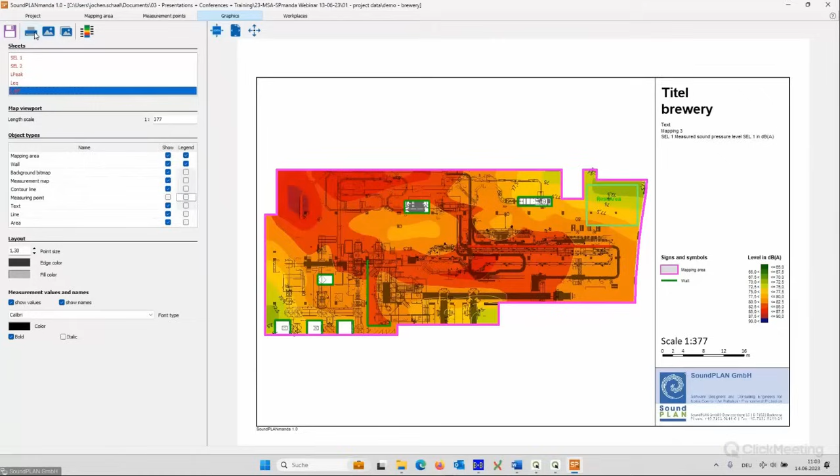You could also multi-select up here in the sheets. Now you can see all of them are red, and they will be printed all at the same time. Or you can save all the sheets at the same time, which makes your work more easy and more convenient.

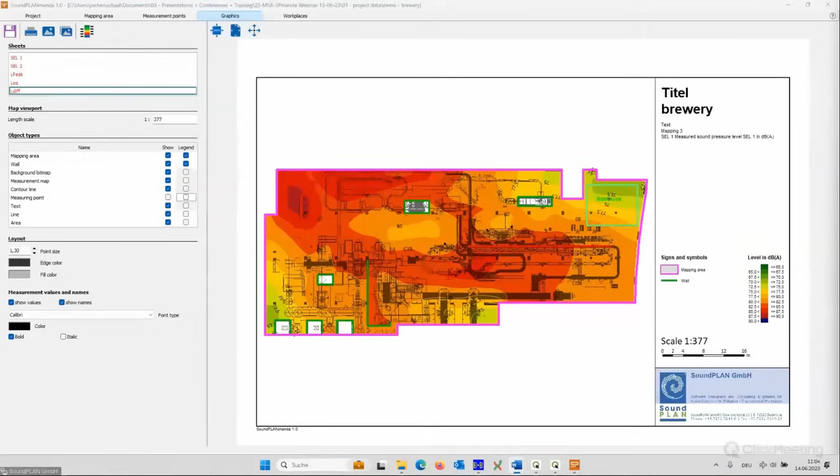Then I go on to the last tab sheet, the workplaces. In the workplaces, you do the assessment of the workers. You remember I chose in the settings the European assessment with an exposure level and the peak level. And in the settings of my values, I selected SEL1, SEL2 and LPeak for the assessment, so they will be used here for the assessment.

What you can see here, in addition, is it created automatically the first worker. But of course, this worker has to work at a certain position, and this is what I can do now down here in this mapping area.

If I want to, I can show the measured values again. Maybe that's sometimes helpful. If I say no, I don't need that, then you just switch it off. I leave it on. So I say okay, this worker number one, call it Mr. Müller,

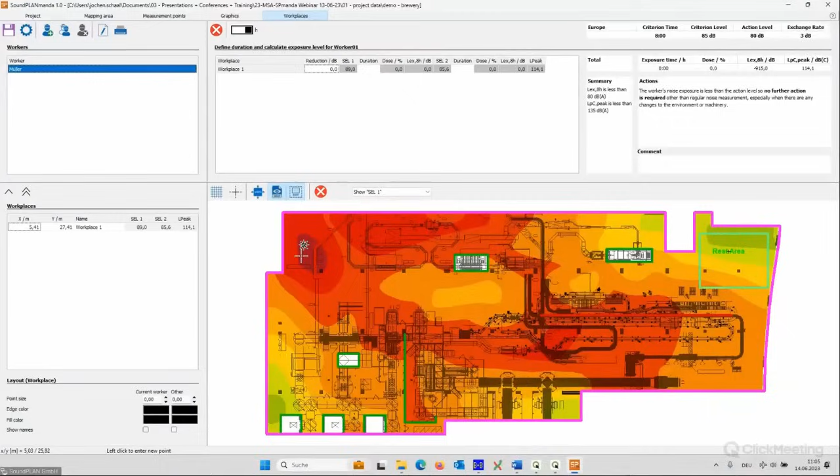is working here. So I created a new working place, which is entered here in the overview of the working places, but was also directly assigned to Mr. Müller. So Mr. Müller is working at working place number one. And Mr. Müller is also working over here, so let's create working place number two.

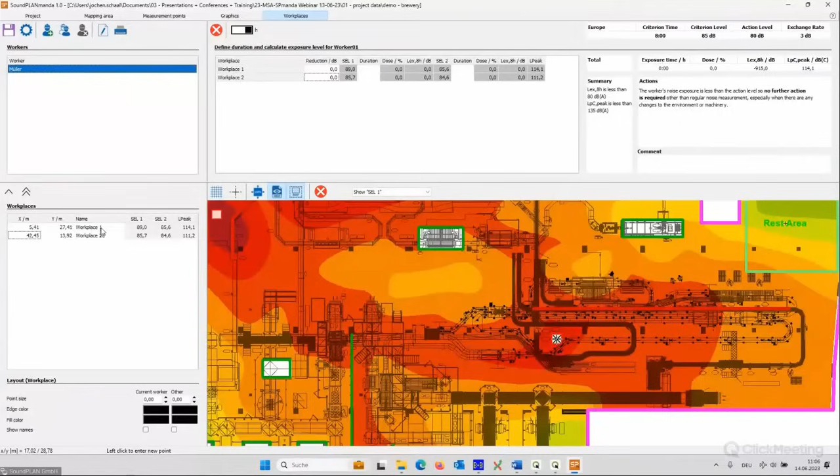Of course, you could change the naming of the working places. I'm now a bit lazy, I will just leave it as working place 1 and working place 2. And that's it, okay.

After assigning working places to Mr. Müller, I have to define how long he is working at those working places. This is a bit tricky here because we have 2 different measured values. So I assume at working place number 1, during measurement period number 1, he is working 3 hours. At the same working place, but during measurement period number 2, he is working another 3 hours. And then at working place 2, he is only working during measurement period number 1 for another 2 hours.

And now you can see the software filled up the dose according to the measured value and the duration, the exposure level for this position and duration for the next one. And it also shows now the peak values for the 2 positions.

And then the total evaluation for Mr. Müller - so the total exposure time, which is, and change it again to - now you can see, now it's just 6 hours, so this is always changing. Now it's 8 hours. The total dose, close to 170%, which is above the limit. And the total exposure level, which is 87.2 dB.

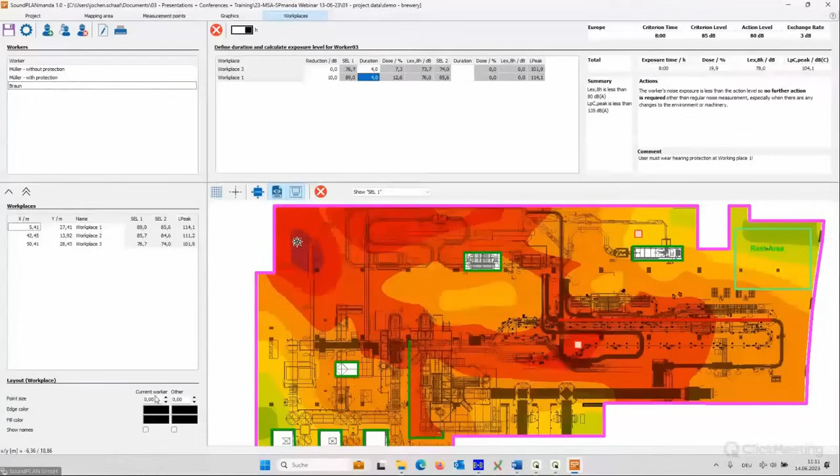In addition, we have the possibility for graphical setups. For example, this would be the active working place, and you can see Mr. Müller is working here and here. The last one is small, which is not assigned, and Mr. Braun is working at working place 1 and working place 3, which are thick yellow, and the last one not assigned is small green. If you want to show the names, you can do that as well.

Tick the mark here, and I like to show the names for the assigned working places, working place 1 and working place 3, for the current worker. So now it becomes very clear which are the current working places assigned to a specific worker. Of course, the last step would be to print the results.

To do that, you first have the option to go to the page layout. Again, we can choose the paper size: A4, A5, A3, letter, whatever. Portrait normally, so it's optimized for A4 portrait for the output. You can have a company logo, which is automatically assigned. In the header and footer, you can have placeholders for project title, company name, total pages, but you can of course enter your own text.

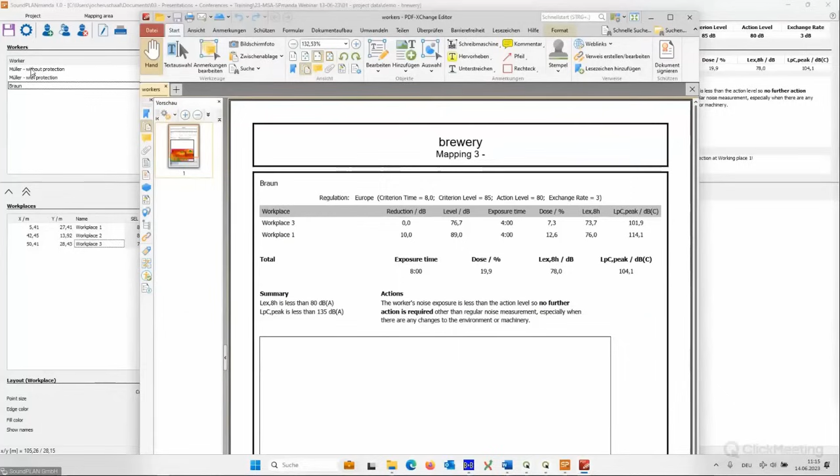And then we go to print, also to PDF again, desktop workers. And I have to open the PDF. And there it is - I forgot one thing, I didn't select multiple workers, so it only printed the selected one. I will do it again, sorry. So the same as with the graphic sheets, you can select a bunch of workers and print them at the same time.

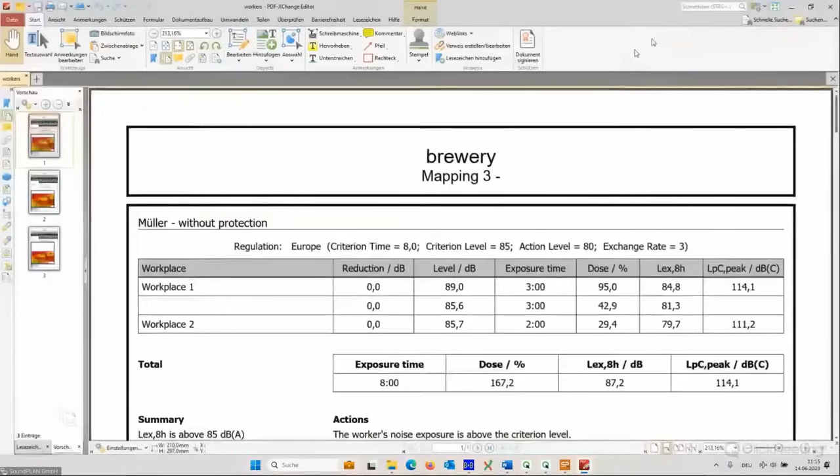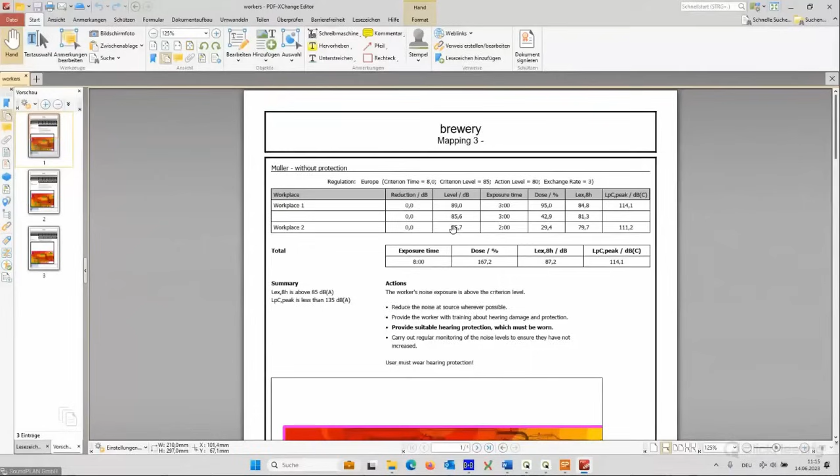Okay, now you should see it. So worker Mr. Müller without protection: here the assessment, the overview of the different measured levels, and the exposure time, dose, and things like that. The total evaluation with the predefined actions and also your own entered text. And down here, the overview where he's working at working place 1, working place 2, and working place number 3 only as a green point because it's not important for this worker. Then Mr. Müller with protection, and you can see here the reduction due to the 10 dB hearing protection.

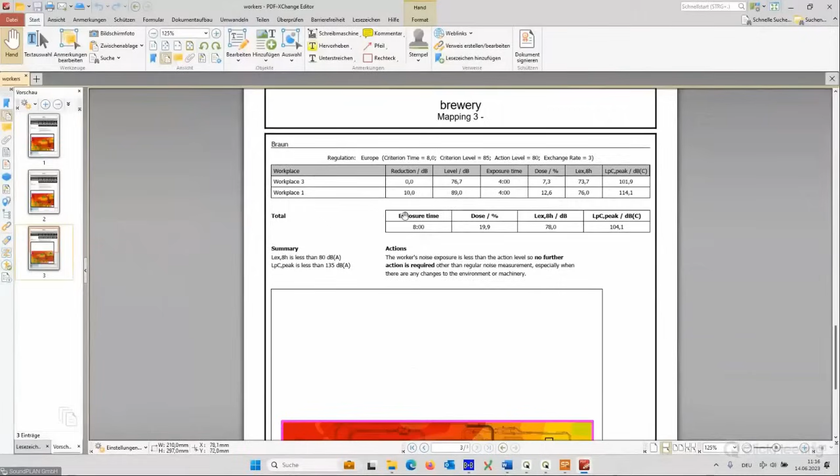Now everything is fine. And then the last one, Mr. Braun, and now it's zoomed to working place 1 and working place 3, giving you a clear indication where he's working, for which time, and things like that. Okay, so this brings me now basically to the end of the presentation.